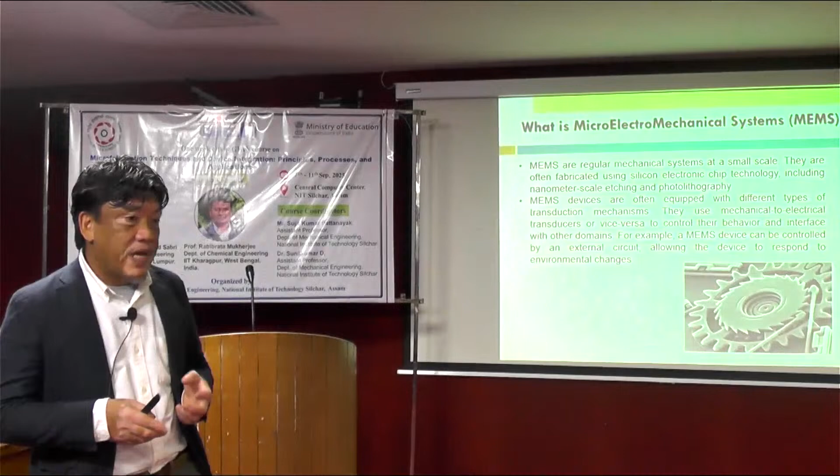For example, as I've mentioned, you have piezoelectric actuators that can be the motor to move certain parts of the machine. You have electrostatic force, which can also make things rotate or move. And you can have electromagnetics, etc., in order to actuate or move some nanoscale or microscale components inside the MEMS devices.

MEMS devices can be controlled by an external circuit, allowing the device to respond to environmental changes. So you can have some kind of actuator embedded into the MEMS devices. Later on, when it responds to heat or light, for example, it can make movement. That sensitivity towards the environment and anything that can make the machine respond can then be used as a tool to accomplish whatever intended work needs to be done.

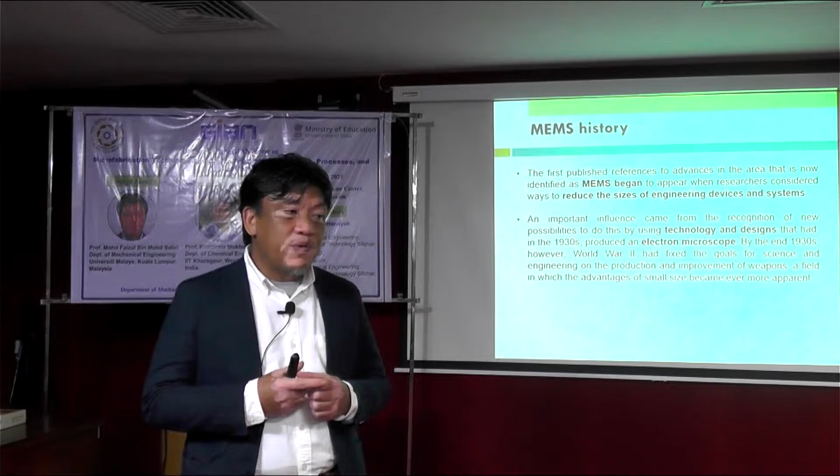A little bit of history of MEMS: the first published reference to advances in the area now identified as MEMS appeared when researchers considered ways to reduce the size of engineering devices and systems. So it's not purely from a requirement for small things - MEMS also evolved with certain concepts and principles. Originally, we wanted a small device so it would become more efficient than a big device, then you proceed with precision engineering.

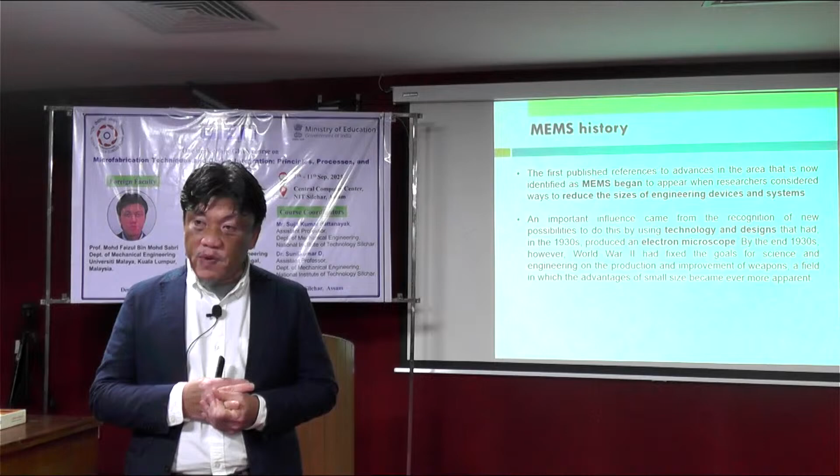From precision engineering, it evolved more toward smaller scale and smaller devices, to lower energy consumption or to increase device performance. So you make it smaller and smaller, and with that you move more toward sustainable engineering. That is part of the philosophy or initial intention of MEMS.

An important influence came from the recognition of new possibilities using technology and design that, in the 1930s - quite a long time ago - produced an electron microscope.

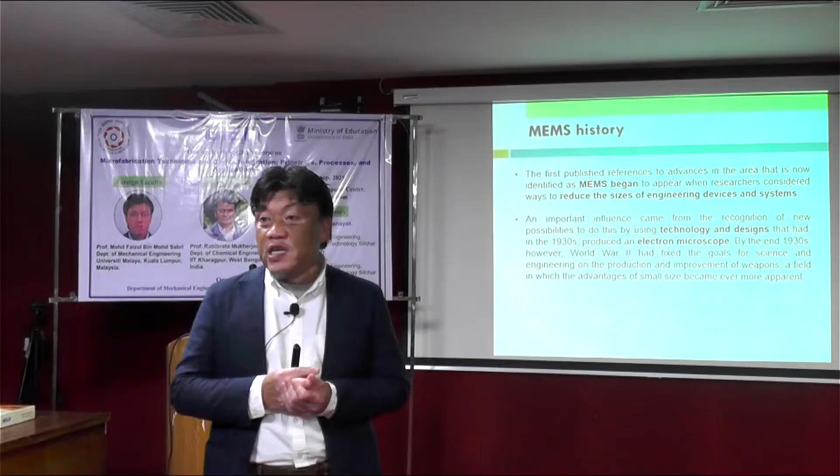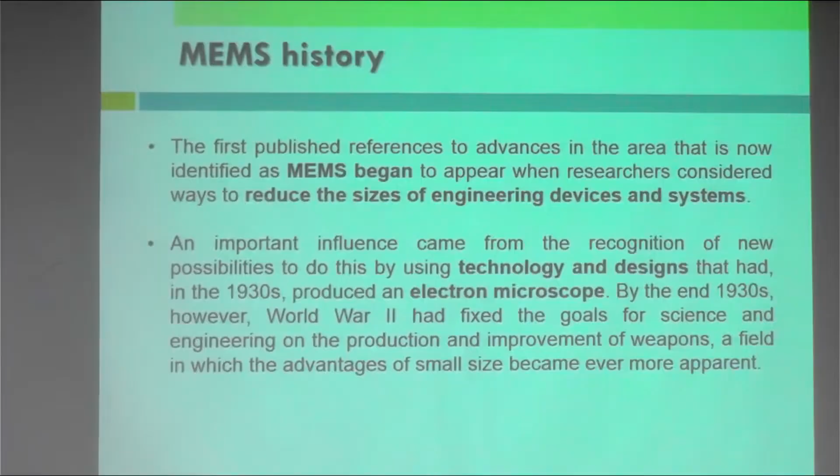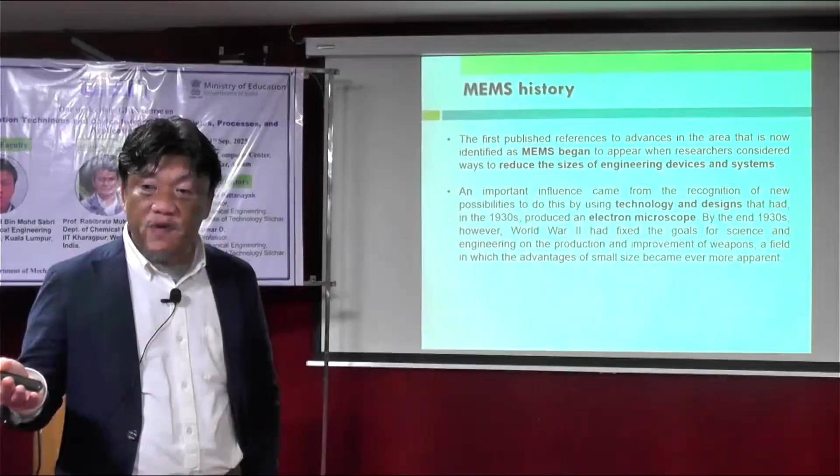The first electron microscope was introduced, but to make an electron microscope you need technology, because scanning electron microscope, or SEM, is very precise and uses a lot of high precision things. With that, you need to develop something small in order to make things precise. So starting from there, it evolved towards precision things for military and aerospace applications.

A compelling urgency for miniaturization arose from the needs for robotic systems in the new growth area of rocket systems, for example. That is part of it. When the war finally ended, progress made in robotic control systems became a stimulant for space research, an area brought into sharp focus at the newly founded JPL.

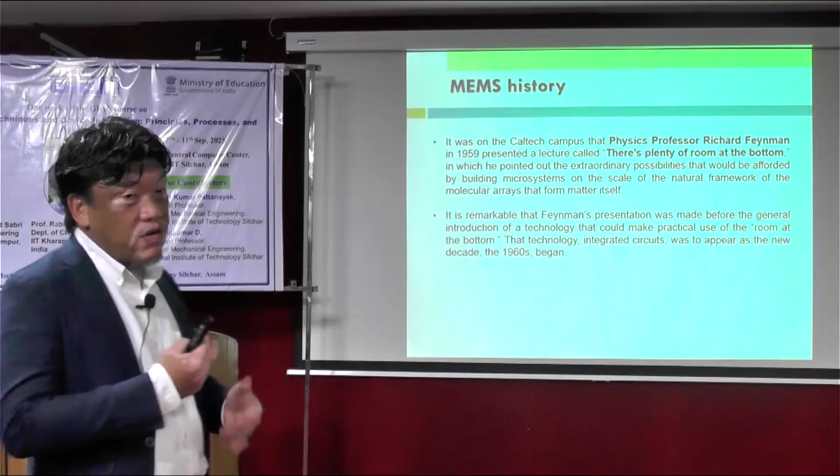I think most of us know JPL at Caltech. He was a Caltech physics professor, Richard Feynman. He wrote an essay titled 'There's Plenty of Room at the Bottom.' This was his philosophical look into materials and products to be developed at the small scale, in which he pointed out the extraordinary possibilities that would be afforded by building microsystems on the scale of the natural framework of molecular arrays that form matter itself.

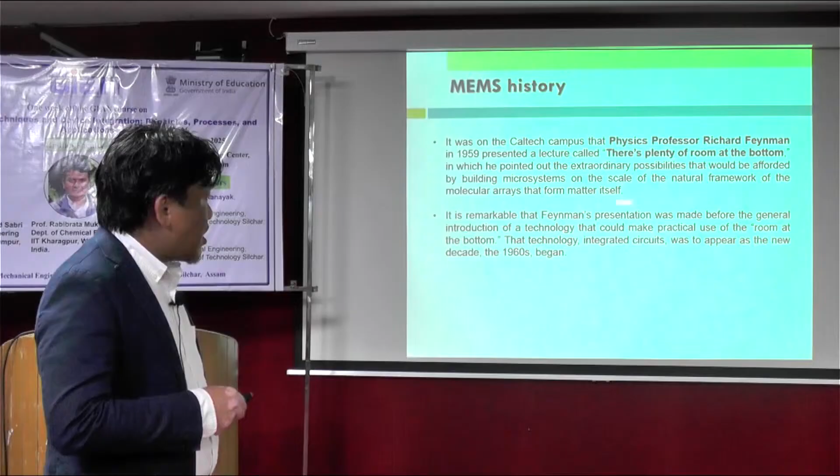It is remarkable that Feynman's presentation was made before the general introduction of a technology that could make practical use of room at the bottom. So all these things are about, as I mentioned before, semiconductors - the integrated circuit, IC, which appeared as the new thing in the 1960s decade.

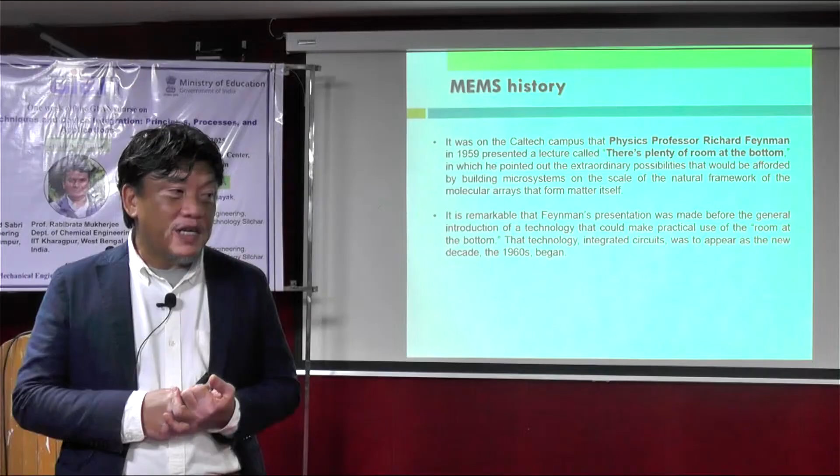I think everyone knows when we talk about chips, now you talk about 2 nanometer, right? Intel introduced 2 nanometer, 3 nanometer has been introduced, but now TSMC, Taiwan Semiconductor Manufacturing Company, is developing mass production for 2 nanometer circuit lines. So that is where we are heading with MEMS and microfabrication.

The growth of MEMS was very slow because researchers concentrated their attention on the expanding capabilities and commercial products that could be developed in purely electronic integrated circuits. So the focus was IC design using semiconductor processes rather than developing the device itself.

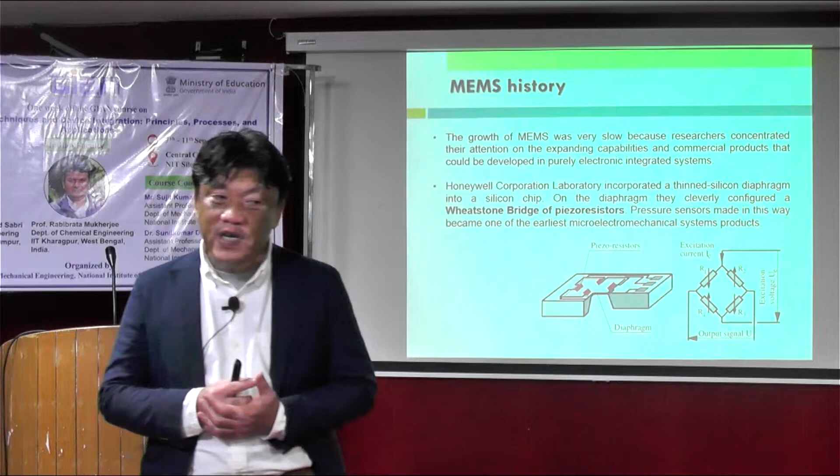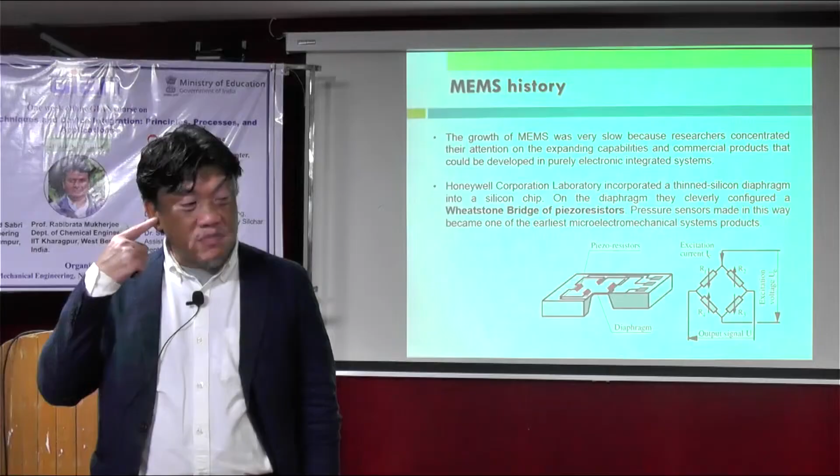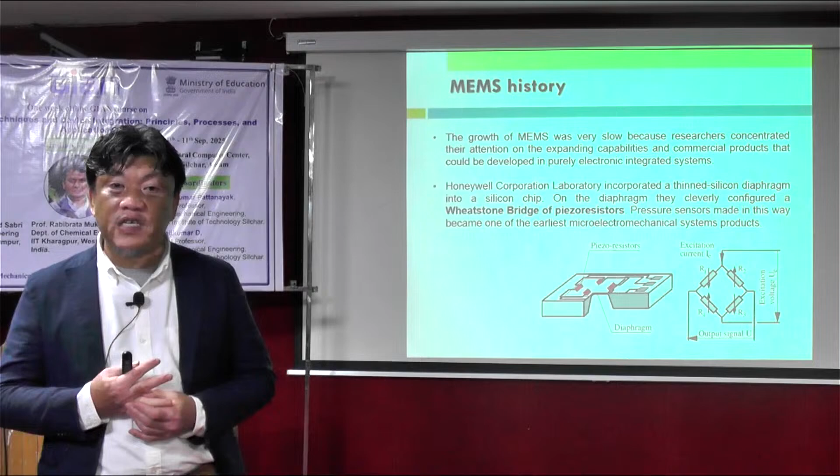Now, if you see, you have a MEMS microphone, right, in your handphone. Even your earbuds have a MEMS microphone and also speakers, MEMS speakers. So that kind of device came a little bit later because people concentrated too much on the integrated circuit itself rather than the device. But you can see a lot of devices in biomedical applications, in electronics applications such as speakers, etc.

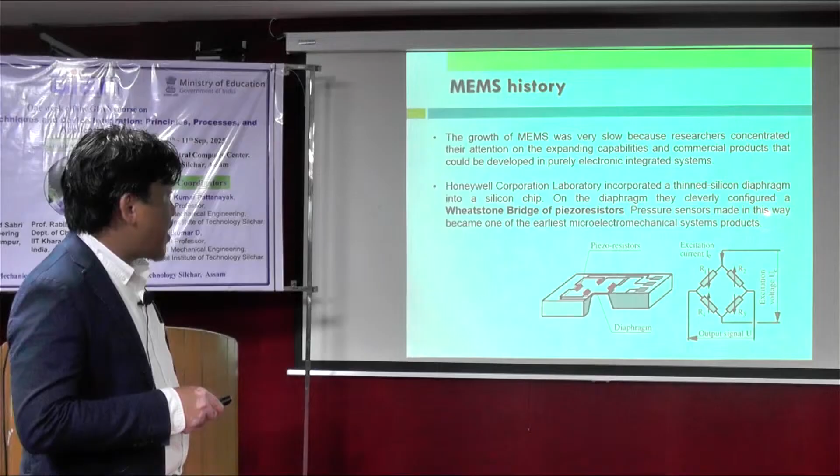Honeywell Corporation Laboratory incorporated a thinned-silicon diaphragm into a silicon chip. On the diaphragm, they cleverly configured a Wheatstone bridge of piezoresistors. Pressure sensors made in this way became one of the earliest micro electromechanical system products developed. So this kind of pressure sensor, when there's a pressure difference, pushes this diaphragm.

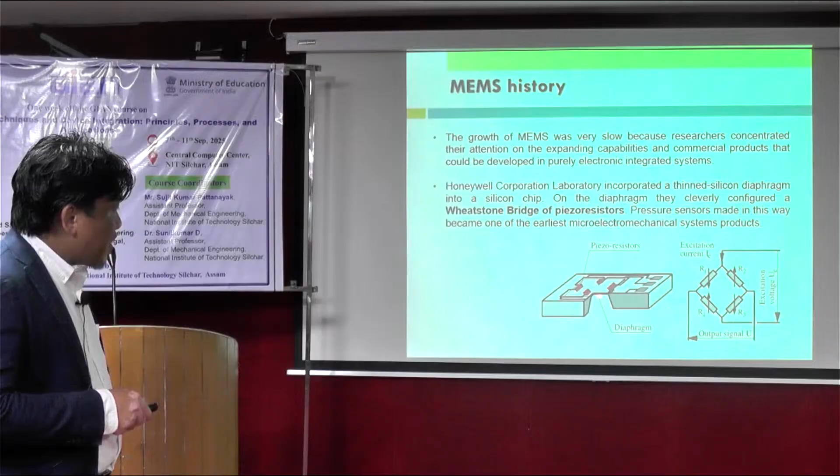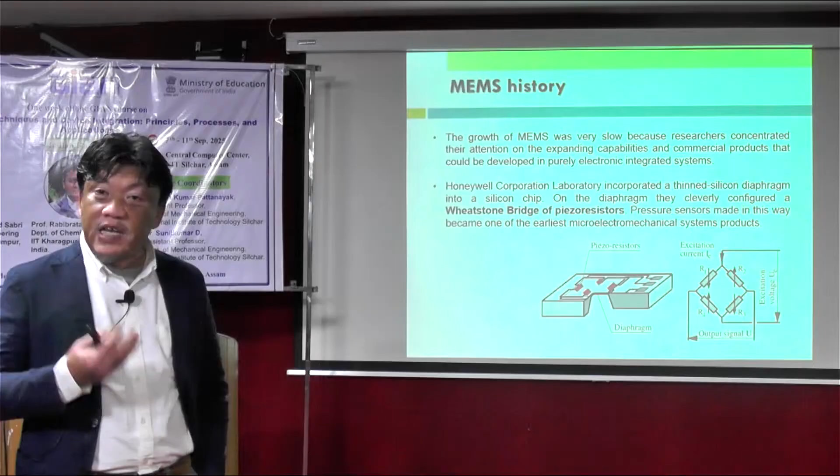With a piezoelectric material, when you provide strain to it, you can induce electricity. That electricity is a signal of the change of pressure. So that is a very simple but quite accurate pressure sensor.

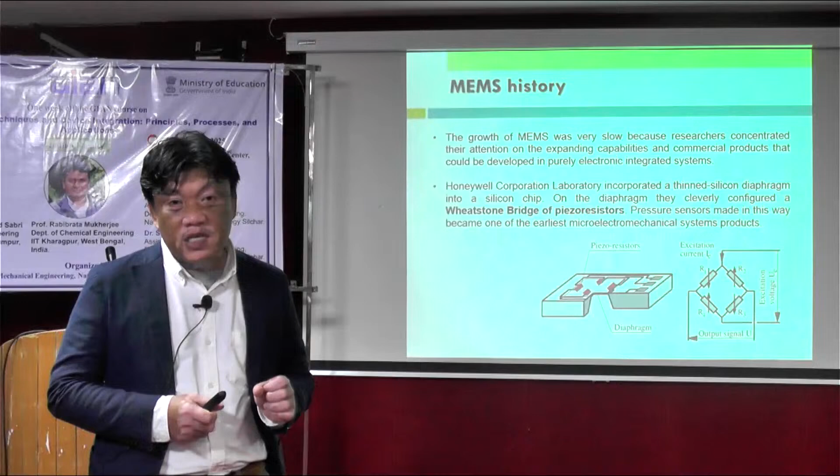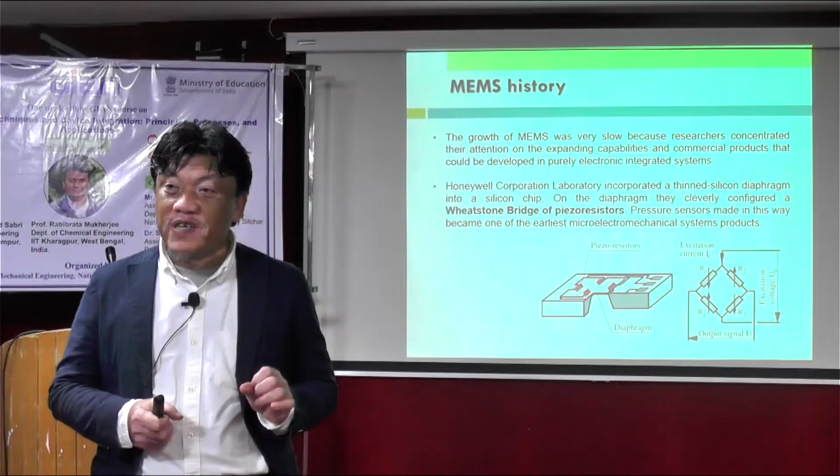This small pressure sensor, later on, can be used in quite a few places. For example, if you have an expensive car like a Mercedes, you have a pressure sensor in the tire itself. So if it's deflated or anything happens to the tire, the car can react accordingly because you can always measure the pressure of the tire inside.

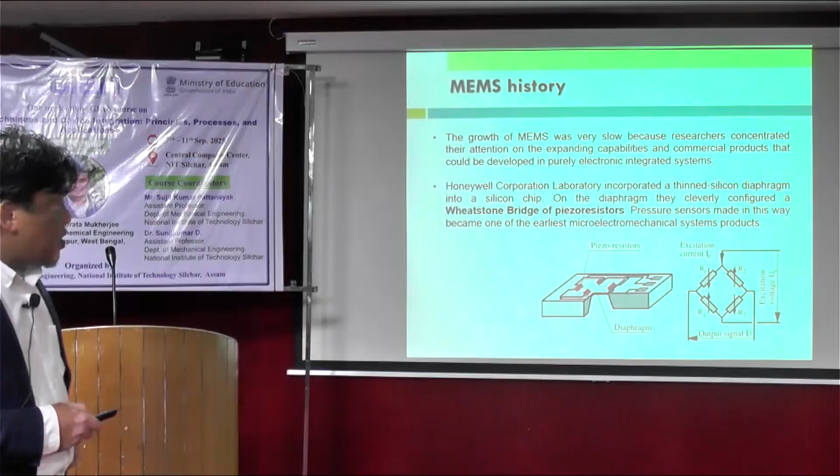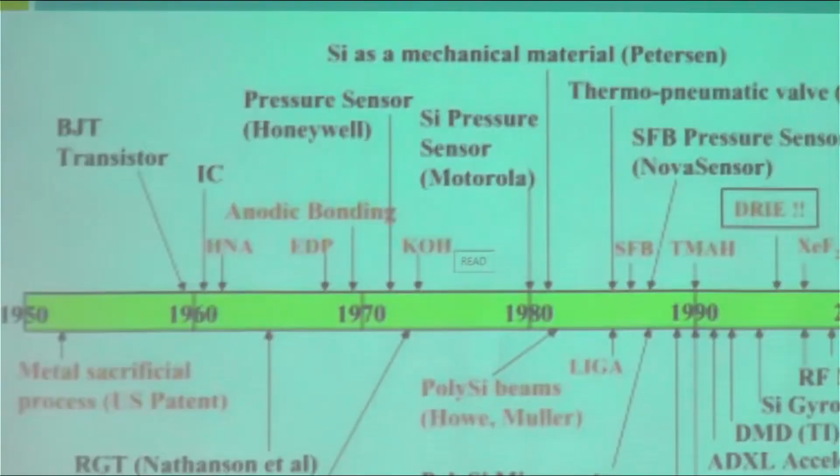Okay, a little bit of a summary of the overall MEMS devices. In the 1950s, the metal sacrificial process was patented in a US patent. Metal sacrificial means you have a layer of metal, then you sacrifice it to develop a certain pattern, because certain different materials can be removed using different chemicals. We call it etching - you can remove certain materials, for example with hydrochloric or sulfuric acid, with different kinds of materials.

So using this kind of knowledge, you can make a sacrificial layer, for example. You have IC, everything, and then a pressure sensor in the 1970s, for example, and you have a thermopneumatic valve in the late 1980s, and polysilicon beams, and a lot of IR imagers, infrared, right? Infrared imager by Honeywell, polysilicon comb drive.

Comb drive is, maybe I will introduce you later. It's an electrostatic actuation method using comb shape.

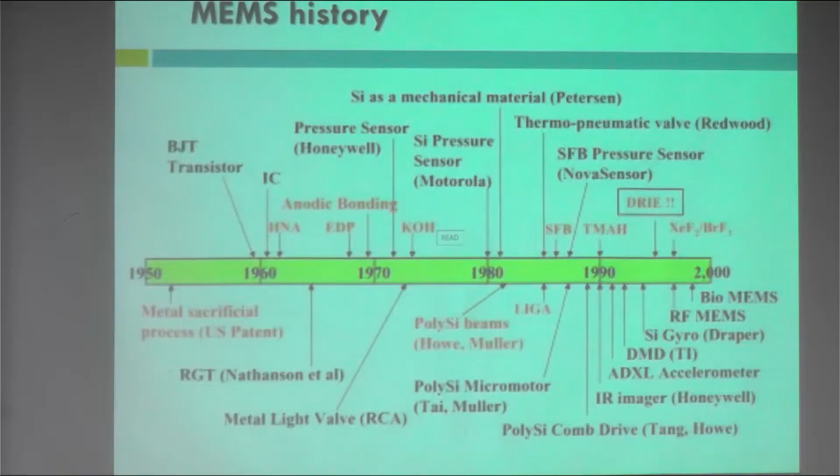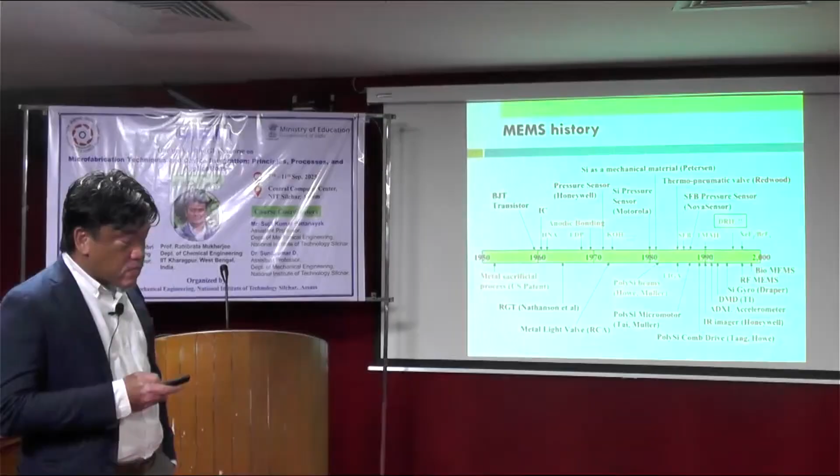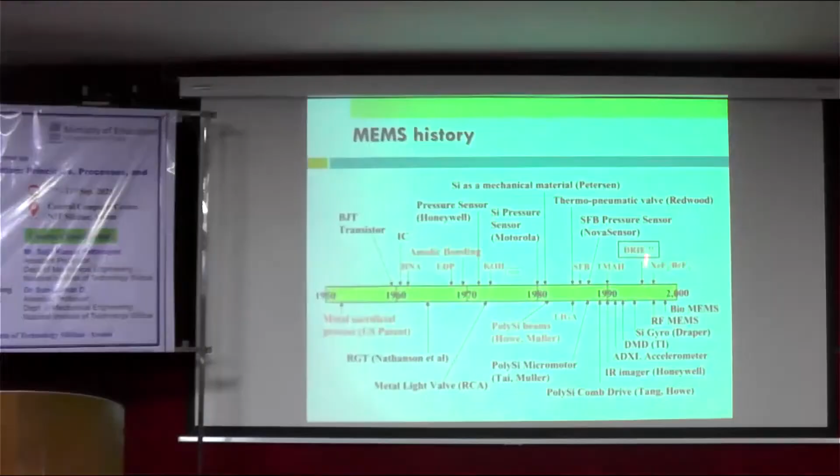So this is where DRIE, or deep reactive ion etching, is a process to remove material using ion bombardment, developed in the late 1990s. A lot of RF MEMS - RF is radio frequency - enable our different 3G, 4G, 5G networks using high frequency domain of things. So using MEMS, you can have something smaller, then you can have higher frequency without damaging the materials itself.

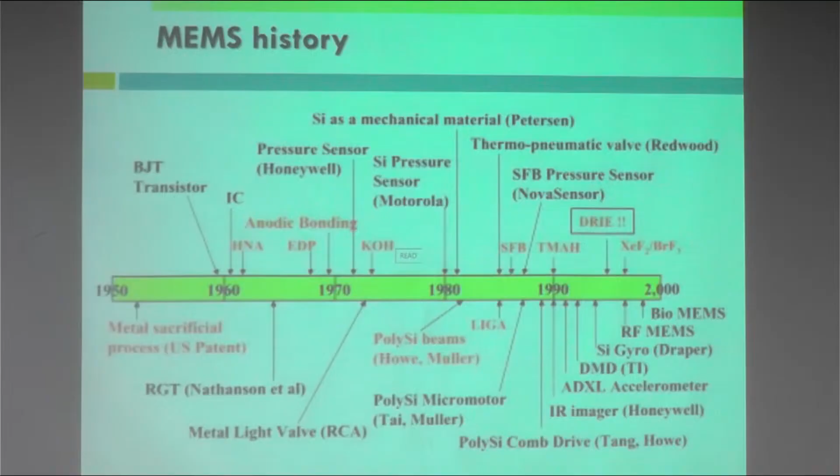So bacteria, then sugar molecule at 1 nano - bacteria is about 1 micron. If you talk about a 2 nano device, a 2 nano electric circuit, this is at the molecule level. So the arrangement of 2 molecules of sugar is the circuit line. Imagine it's just a contaminant we normally cannot see with the naked eye.

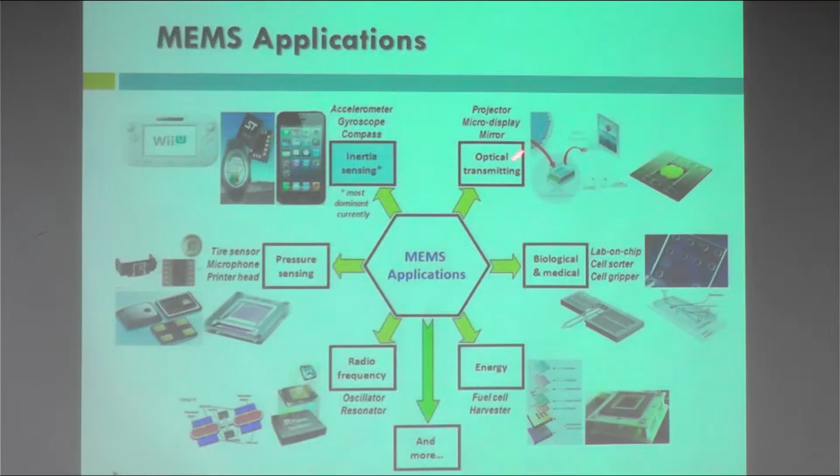We have a projector for micro display. I think you have seen in some devices you can project some video or image on the wall using small devices as well.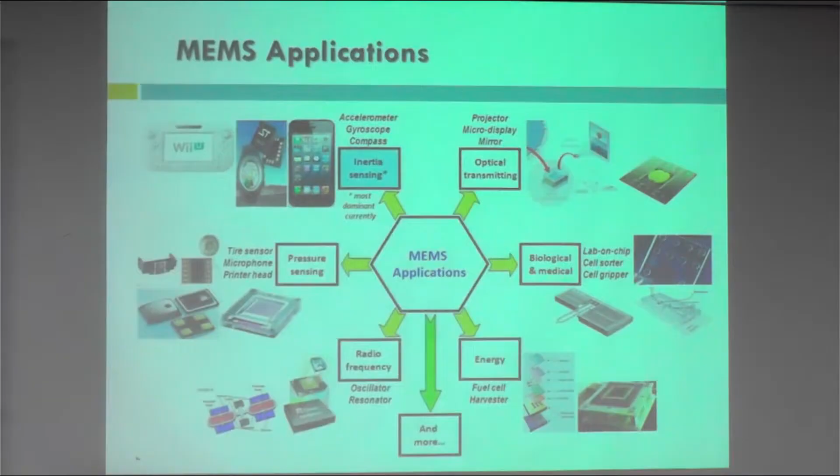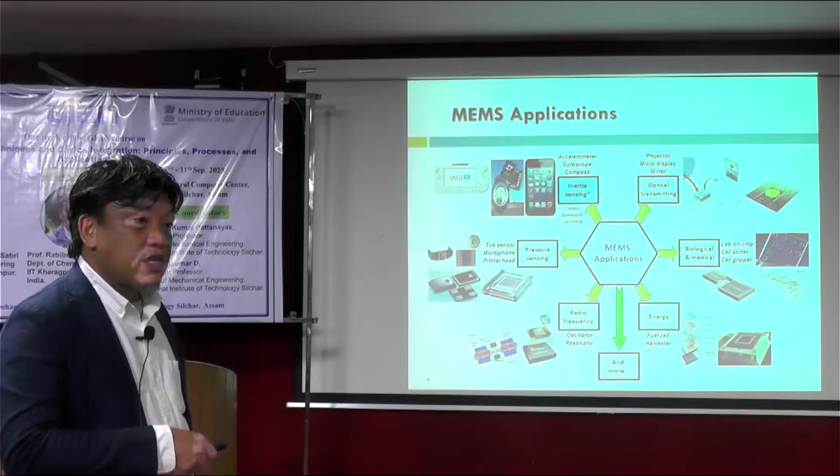Then for biological and medical devices, we have microfluidic sensors. You make a very small microfluidic disc, for example, then with rotation, you can mix biological substances with a chemical to detect something. You can also measure using this kind of cantilever - you can measure one molecule of things, getting feedback from your measurement of a very precise molecule. You can measure the heat of a molecule, or the weight of a molecule, using this kind of cantilever, depending on the materials and principle you are using.

Then for fuel cells, you have a membrane, for example, to fabricate the membrane and the electrode for the fuel cell, and RF MEMS as I mentioned - very small devices now with high frequency 5G, 6G coming. Then you have pressure sensors, as I mentioned, in tires, in microphones, printer heads. We will see some examples later during our case study for MEMS applications in detail.

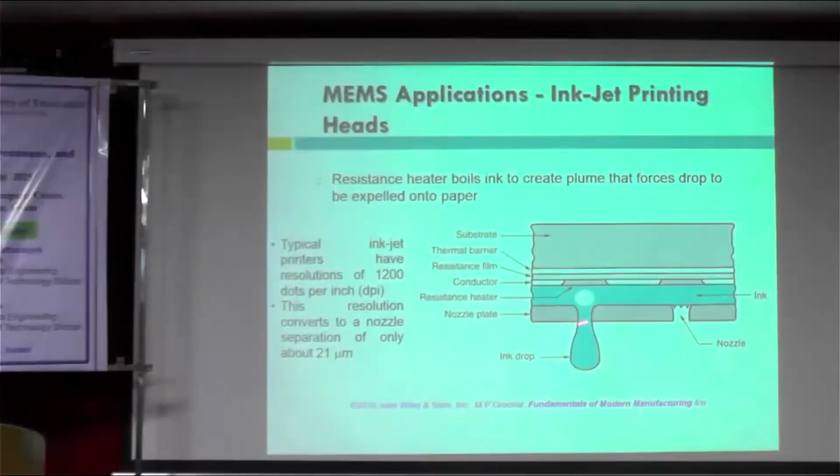So this is just to provide a quick glance of MEMS application. Let's say you have this inkjet printing head. With this inkjet printing head, you have a small nozzle, a few microns, depending on design. For example, with resolution of 1200 dpi, this is about a 21 micrometer nozzle. So you use a resistance heater. When you heat up here, this fluid or liquid will expand due to heat, and you can have a drop of ink injected from here. So of course, you have different types of inkjet heads. You can use piezoelectric, for example, as an actuator.

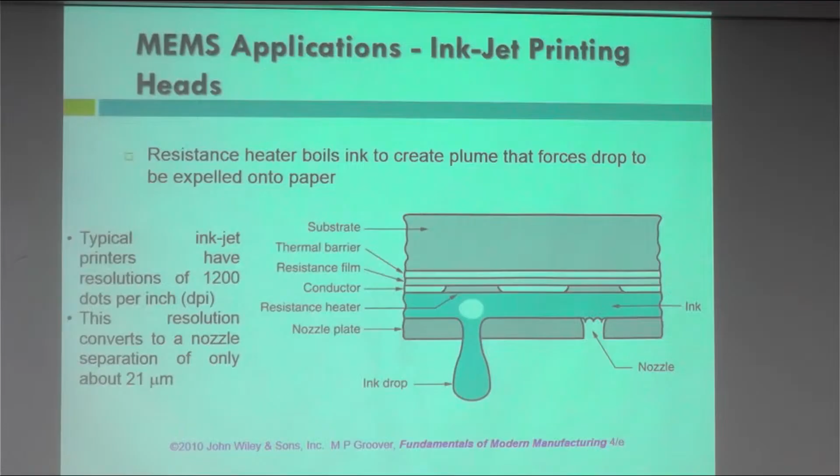And we are dealing in the next 50 years with the SDG, UN Sustainable Development Goals. We are predicted to need to address issues of energy because of increase in population. We have to look into water security, food security, environmental issues, poverty, terrorism and war, disease, education, democracy, population, etc. But some of these can be addressed by using less materials. If we use MEMS technology with micro scale devices, we can use less material instead of using a big bulk material to have devices at a big scale.

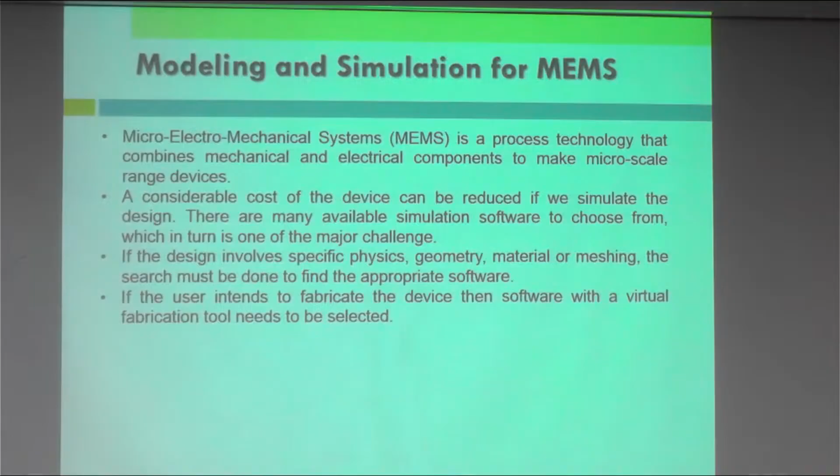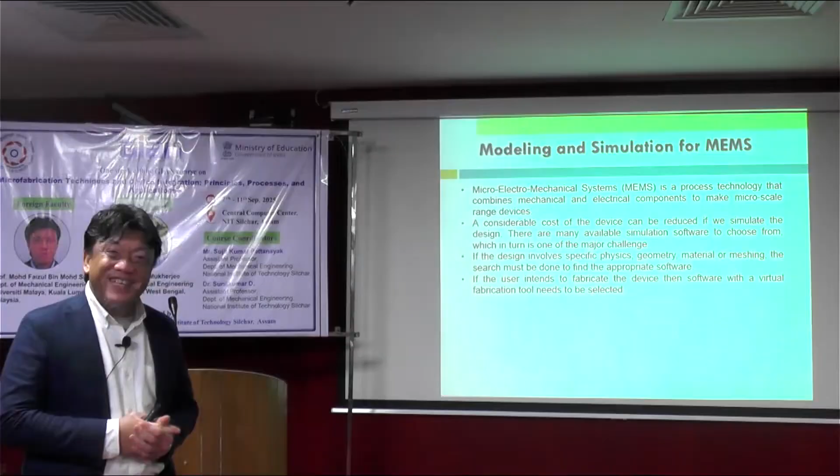Skip this one. Okay. Then we look into the modeling and simulation for MEMS. I think some of you become sleepy. It's just me talking. Any questions so far? No? Everything good? Okay, so shall I continue?

Microelectromechanical system is a process technology that combines mechanical and electrical components to make micro-scale range devices. A considerable cost of the device can be reduced if we simulate the design. It's the same as some other things as well. There are many available simulation software to choose from, which in turn is one of the major challenges. If the design involves specific physics, geometry, materials, or meshing, a search must be done to find appropriate software, because some software has limitations.

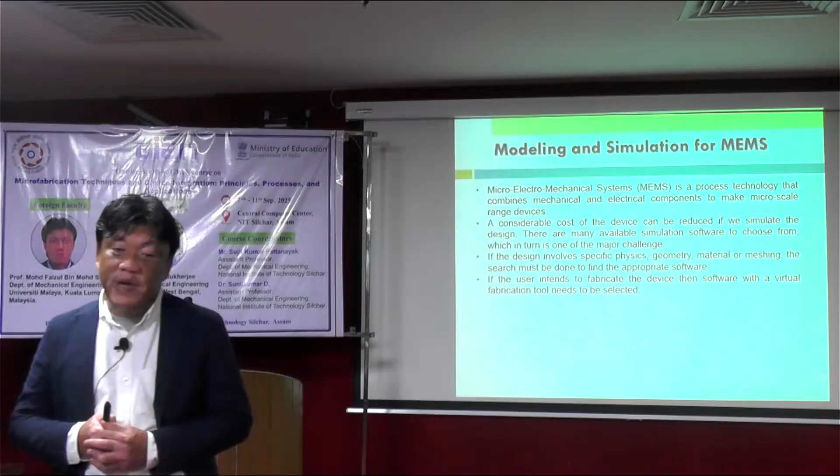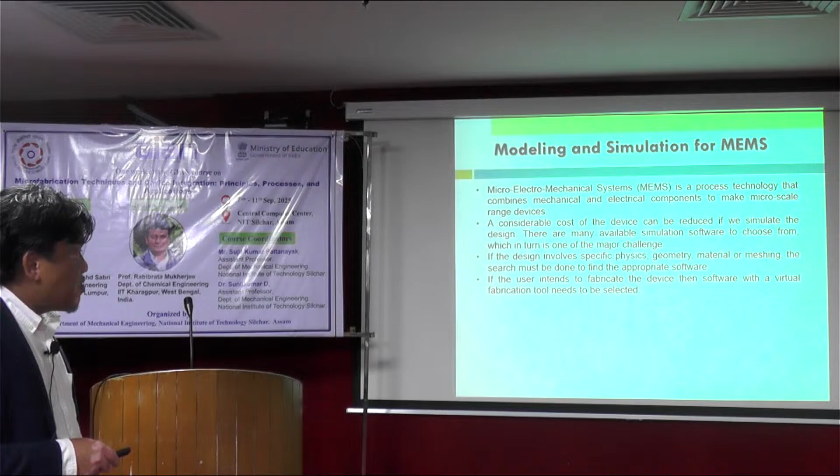You can simulate at a micro scale, or you can simulate at macro scale, but the thing is, at the micro and nano scale, things do not follow Newtonian mechanics. So you have to integrate a little bit different physics, maybe quantum mechanics or something else. I'm not well versed in this, but somehow Newtonian mechanics for macro scale will not provide accurate prediction. So you need to carefully look into software which can handle this. If the user intends to fabricate the device, then software with virtual fabrication tools needs to be selected as well. So you have process simulation as well for MEMS, but that is a secondary stage.

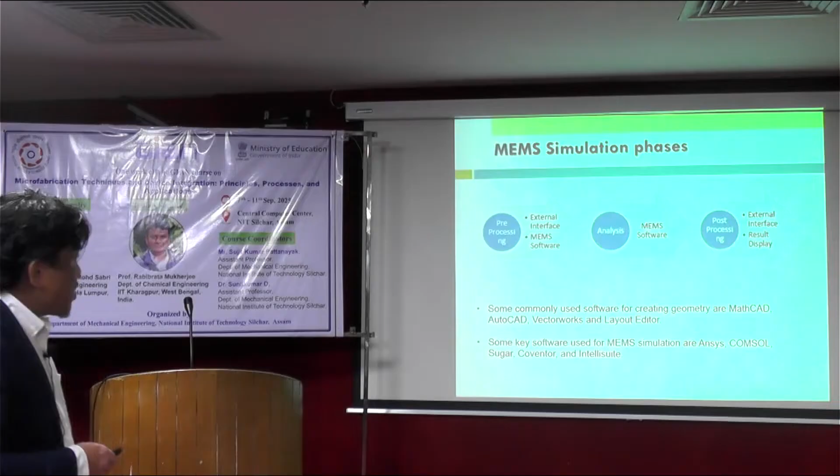But firstly, when you design something, you want to know the performance, right? The device performance. So when you get the device design, the MEMS simulation phase involves pre-processing, external interface, then MEMS software. Then you have software to do analysis with the MEMS software. Then you have post-processing, external interface, and result display. So this is quite similar to what we have with common software processes.

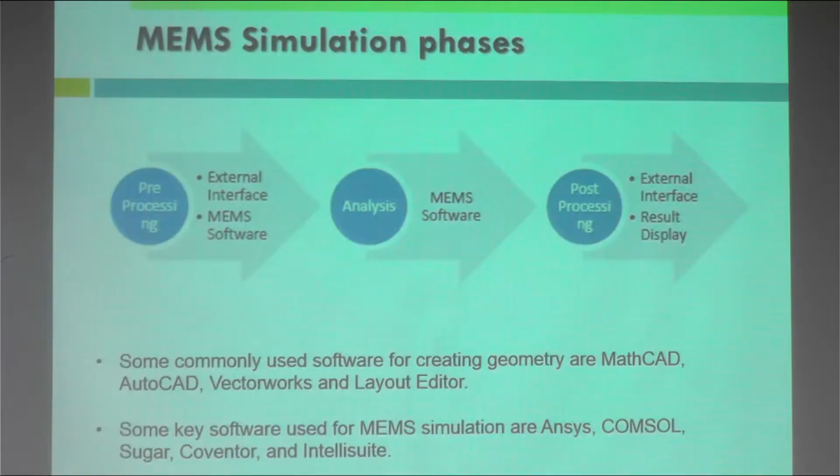Some commonly used software for creating geometry include MathCAD, AutoCAD, Vectorworks, and Layout Editor. Some key software used for MEMS simulation are ANSYS. Has anyone used ANSYS so far? No? Okay, are you familiar with ANSYS? Okay, good. And you can use COMSOL, Sugar, Coventor, IntelliSuite. So these are quite commonly used MEMS software to simulate MEMS.

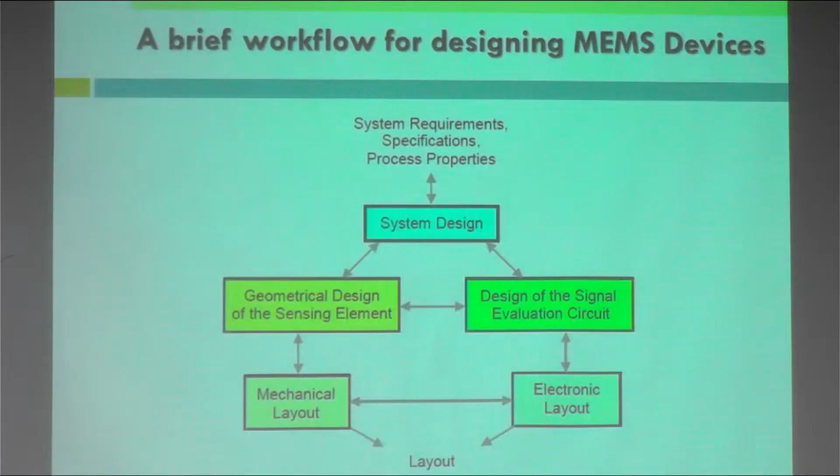Then you have your mechanical layout and your electronic layout. Some devices integrate everything, but some just provide the electronic layout or circuit layout on the MEMS devices. Then you control everything at the other, integrate electronic parts. Then you have your overall layout here. So this is the general process of designing a MEMS device.

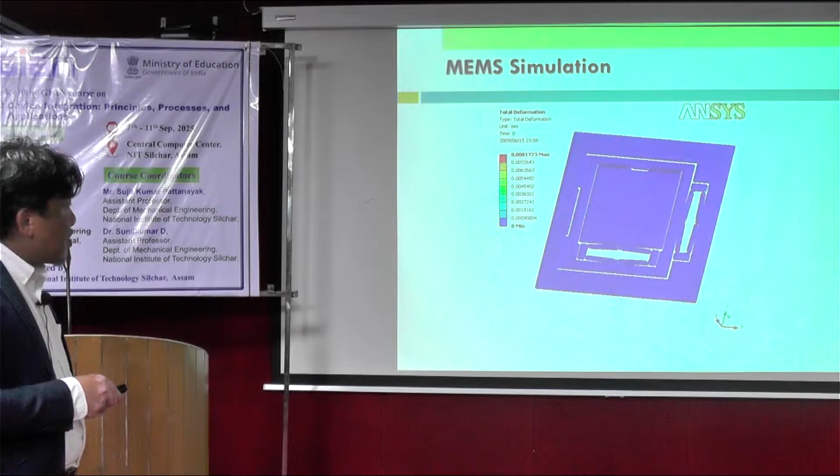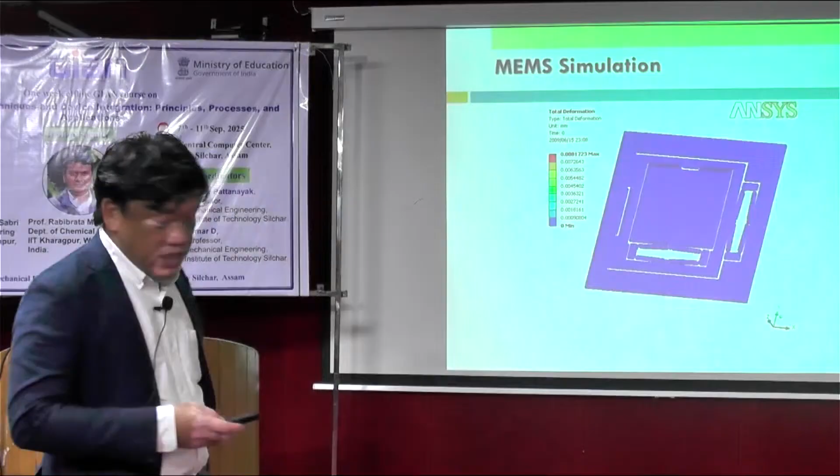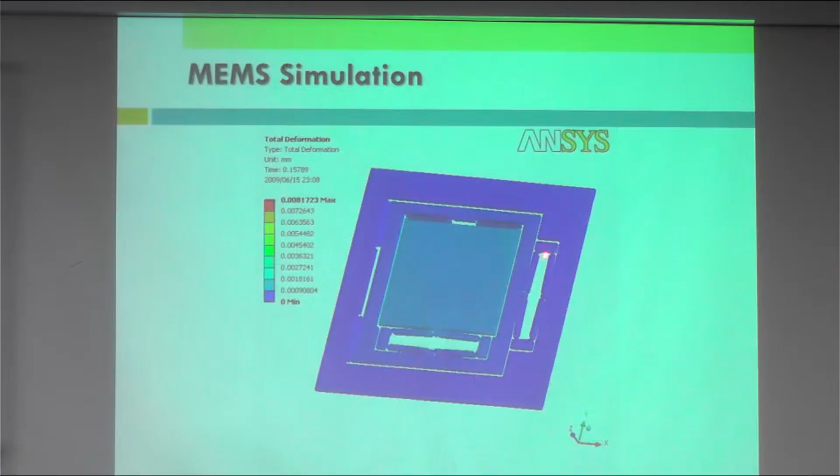There is a kind of animation for this. You can see that you can move for both direction X and Y. So you can simulate this using ANSYS, and this has been done by providing force here, because this place is intended to have an actuator, so piezoelectric.

So it expands here. When the piezoelectric actuator is located here, then you can have the expansion of the displacement of the piezoelectric. Then it will push these two sides. Then this stage will move to the right, and the same here.

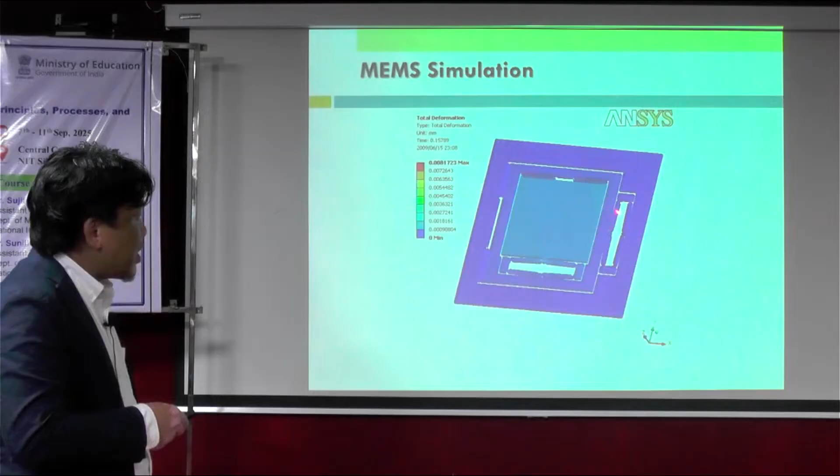So that is the piezoelectric actuator with a MEMS. Of course, this simulation is intended to measure how far you can move the stage in X and Y direction, and how much force you need to exert on both sides, meaning it will provide some specification or requirement for you to design the actuator as well.

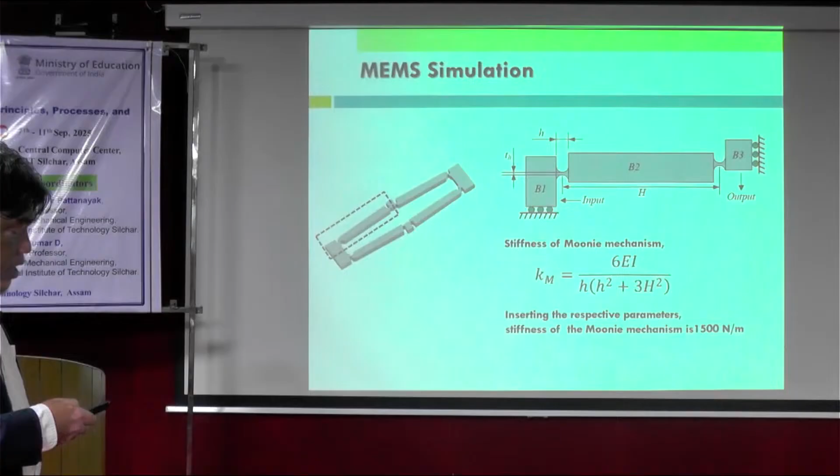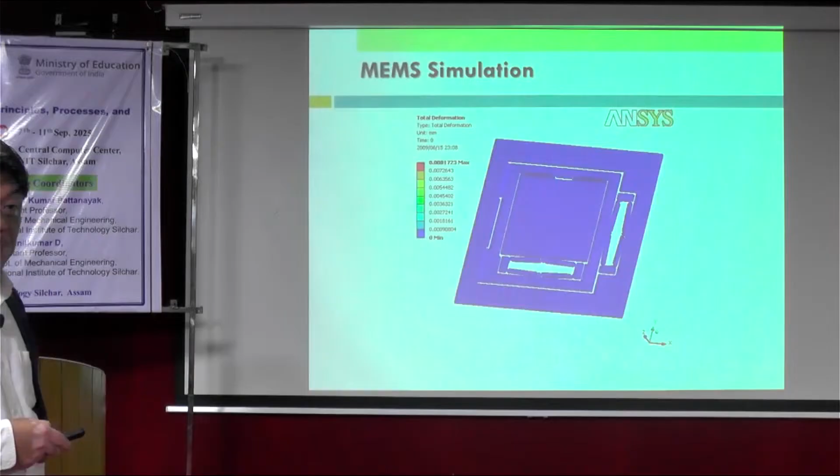Apart from that, there is a hinge at every place, because this hinge will provide the flexibility to move, to make a movement of this stage, for example. Then you can also simulate this hinge itself in order to get the right design and the right hinge size. So when the input force is here, how much will this displacement be?

The displacement of this will provide the displacement of this side. So the design of the hinge is critical to make sure it will be able to move, and to a certain extent have the robustness to hold the loading of the stage itself.

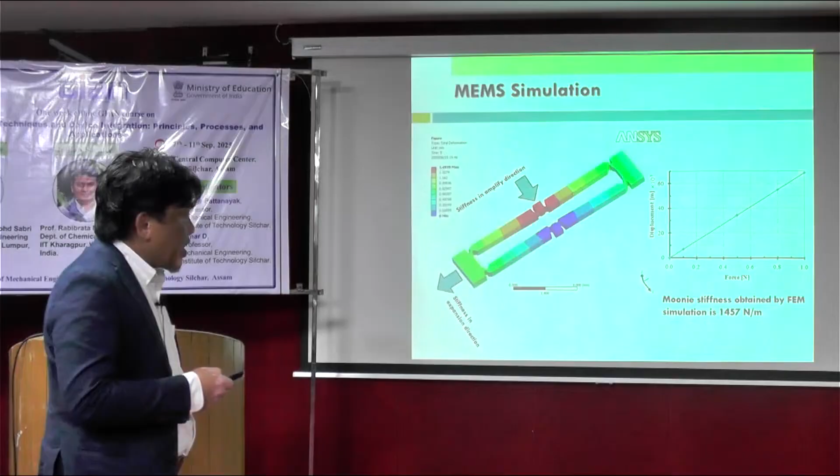It can be done through numerical calculation, and it can also be done by simulation. If you do simulation, for example, you can get the relationship between displacement and force. Force in this direction, meaning how much force you can supply to make the movement, because you have to overcome some other spring issues as well. So this is a kind of simulation that can be done using ANSYS for MEMS simulation.

And this is the actuator that you put in between. So you can do the simulation and get the relationship between, let's say this is FEM, the simulation using ANSYS. You can see that the angle here is very important in order to have an amplification factor.

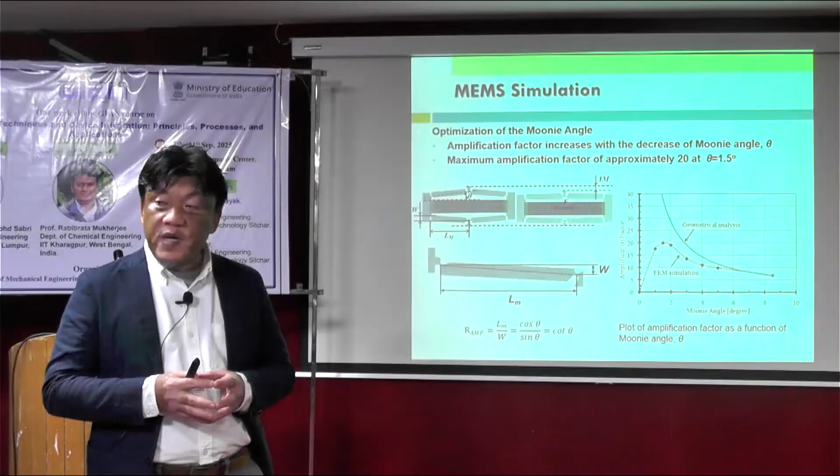This structure basically can amplify the force, and also amplify the movement, the displacement. So with a small displacement, you can amplify it a few times. For example, here you amplify up to nearly 20 times. If your actuator can only make 2 micrometers, with that 2 micrometer movement, you can get nearly 40 micrometers. So with a 2 micrometer movement, you can get this delta up to 40 micrometers. That is a very huge amplification.

Another simulation, another thing that has been simulated for this design, is the stiffness of the spring here. So you have a spring mechanism, then you need to make sure this spring is not so stiff that you cannot make the movement.

But to a certain extent, you have to maintain the robustness of the spring to withhold the stage, because the stage also has some mass. So you need to make sure this spring can withstand it, and also is flexible enough to make sure the movement can be done. So let's say with a 50 micrometer thickness of the spring, you can simulate, then change the dimension to maybe 60 to see how much force is required to make sure the movement can be done by these systems.

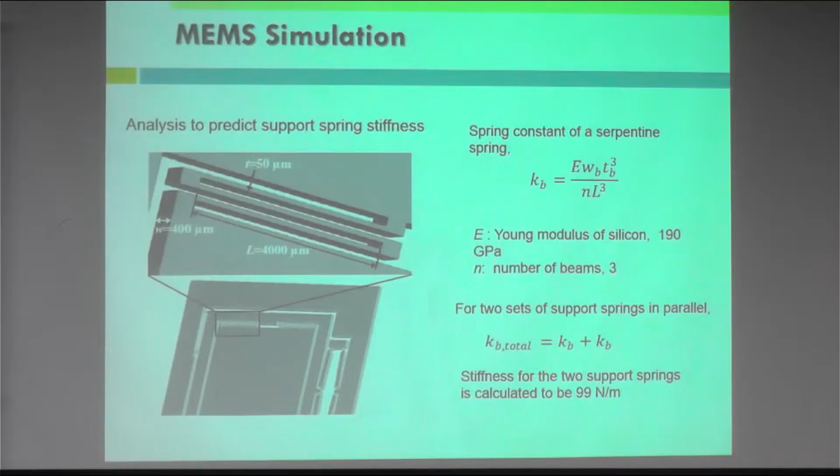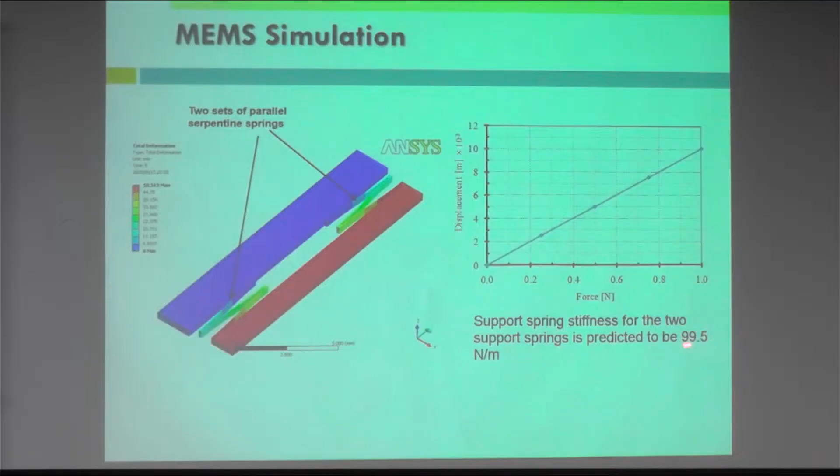So this is another MEMS simulation using ANSYS. It's almost the same thing, but I would like to show you the layout of an example using ANSYS.

I think the file is here. It's not linked. Let me see. Which one? Is it this one? Ah okay, oh sorry.

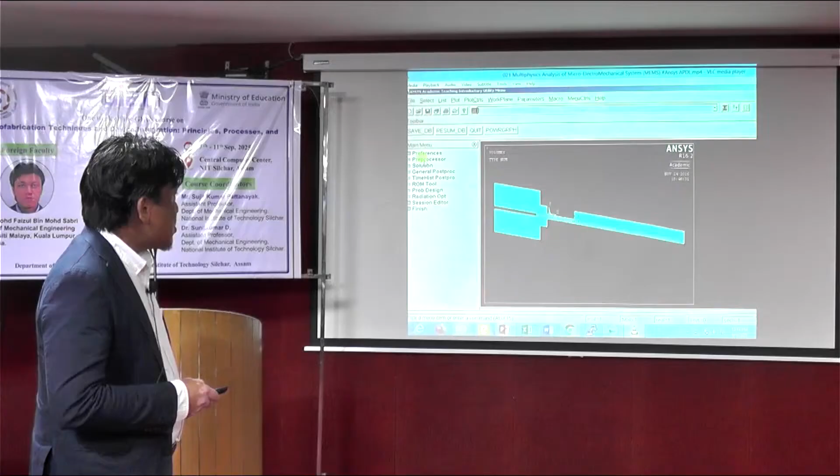This is a kind of cantilever, then with pre-processing. It's not that difficult for those who are quite familiar with the software.

There's basically a tutorial for designing MEMS available for each software. Even if you use IntelliSuite, ANSYS or COMSOL, there are many tutorials you can learn from the company's website. You can learn how to use a certain design, but if you have a different design, you just follow the steps while developing your own design.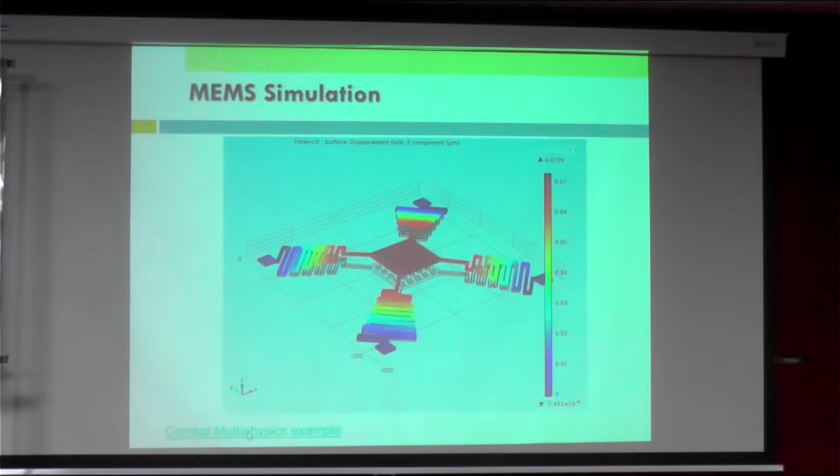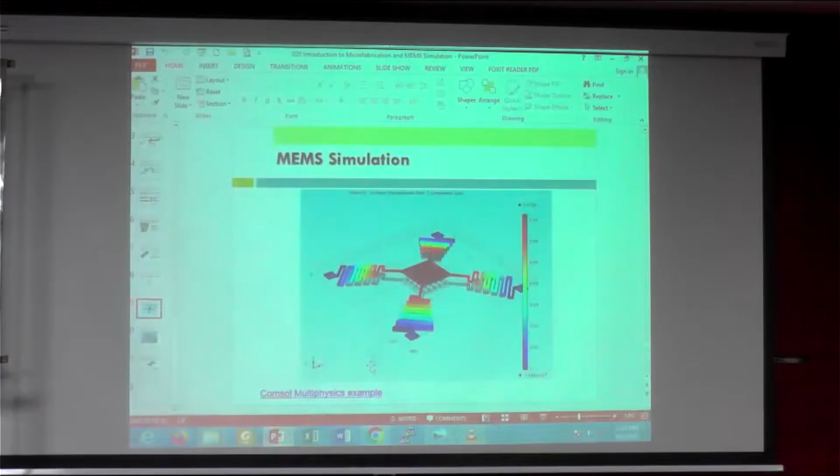That's in the folder, you open the folder. COMSOL, where is COMSOL? Coventor, maybe this one is COMSOL. Yeah, I think so. Just go forward a few minutes.

Hello everyone, HFWorks, which is used for electromagnetic simulation. We have seen within a few years some of these issues. Now let's look at some challenges posed by MEMS applications. Sometimes we can integrate the model created in SolidWorks, and export or import the model into ANSYS or COMSOL to do further multi-physics simulation.

So you do geometric modeling using SolidWorks. Even in SolidWorks, to a certain extent, you can do MEMS simulation nowadays, using different material options versus output results to get the right and optimal behavior of devices, including different material types, anisotropic materials, temperature dependent materials.

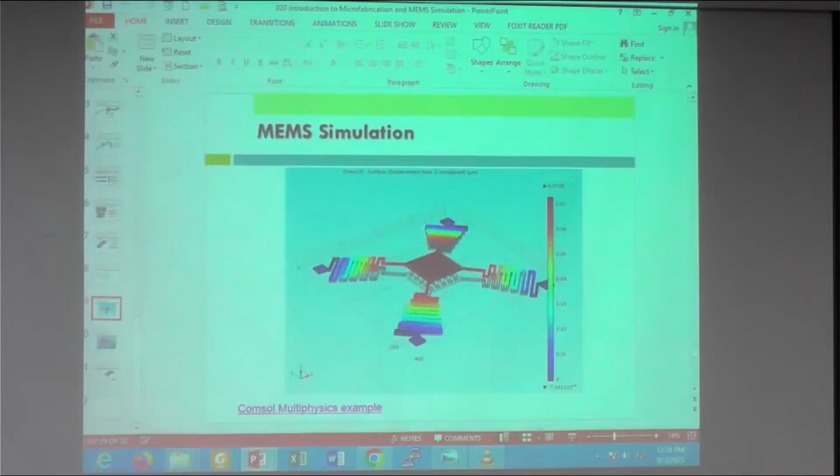Okay, just to get you to know a few things. This is using IntelliSuite. Maybe you can show the interface of IntelliSuite.

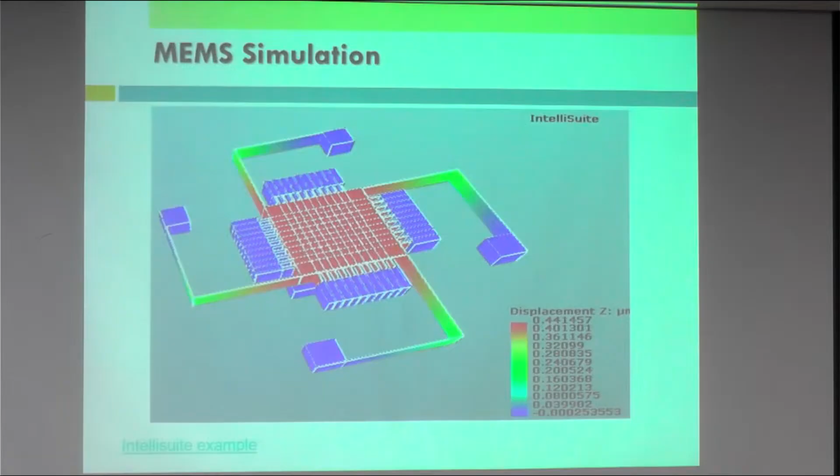So let's start the design of a comb drive structure. Here I've created 2 layers, one is comb and pads. I create them by adding new layers, and I can change the color here. Maybe you can skip a few minutes.

The idea of changing the color is to differentiate between the layers, so it can be used. We can hit escape, so this enables the y-axis selection. Here I select layer fill to have a clear look, and go to modeling to create a rectangle, then you do the simulation.

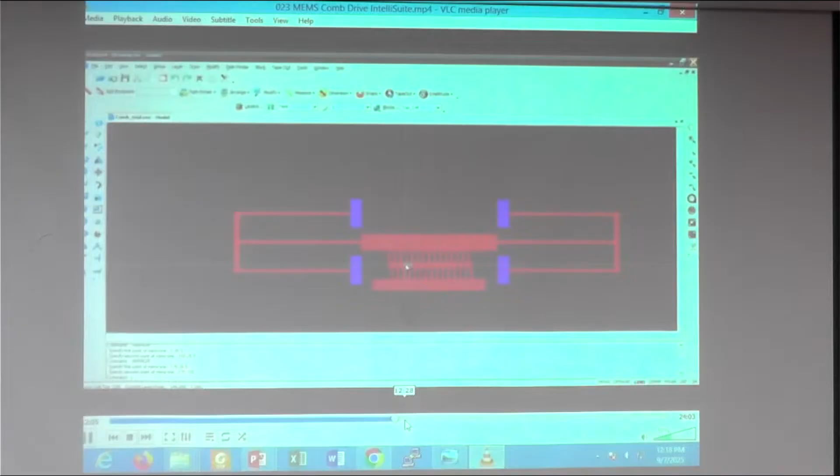Maybe at the center, halfway. Okay, this is a comb drive basically. A comb drive is an electrostatic actuator.

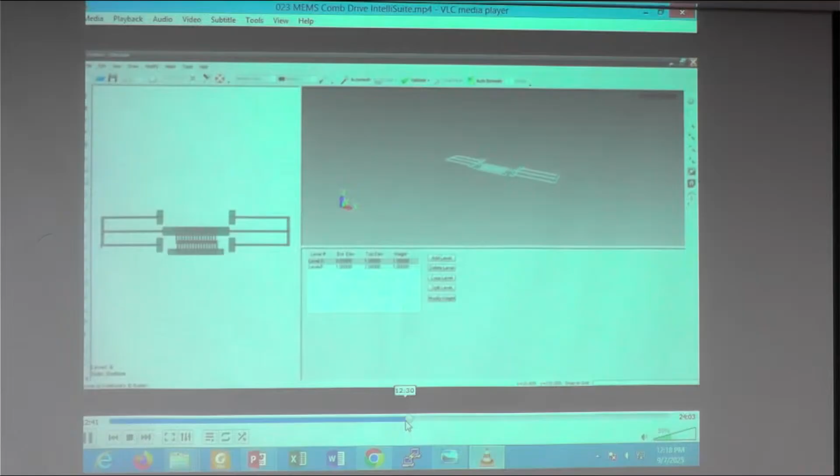So this is how you design, then you do the simulation for the comb drive. Then you apply electrostatic force. Then we see later on how the movement can be simulated, how much movement is made due to electrostatic force on this comb drive.

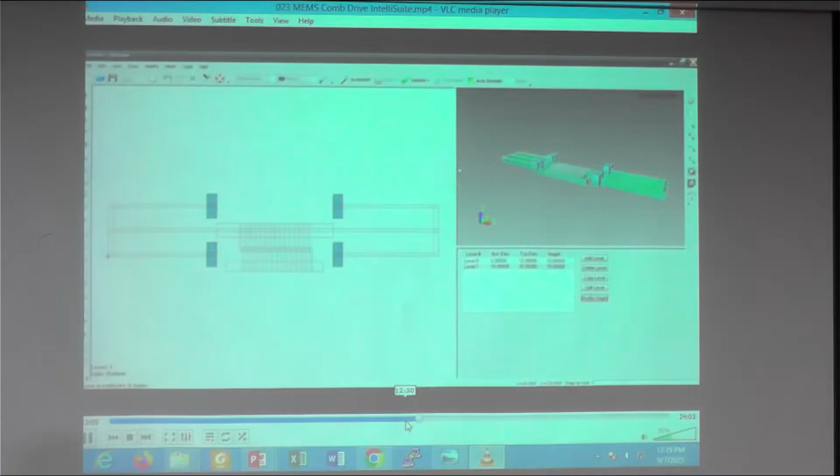A comb drive can be used as an actuator and also as a sensor, so it's bifunctional.

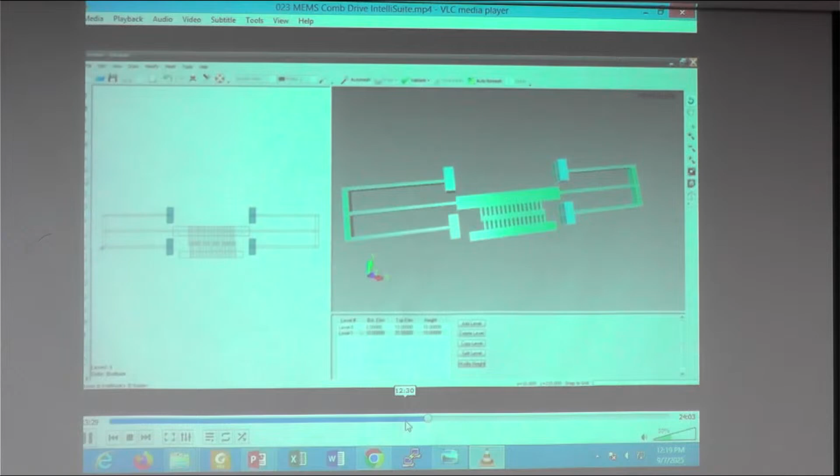Maybe you can forward. Okay, see some animation. So basically, this part is a kind of anchor.

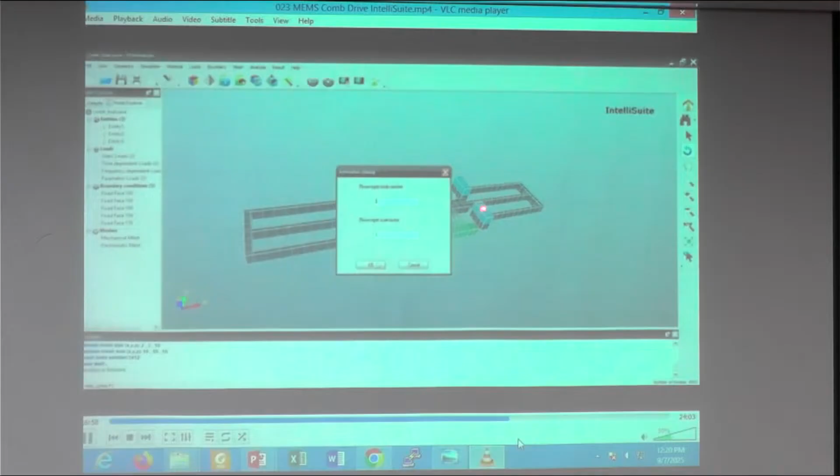For a comb drive, you have to have a circuit line on this, so that's where the MEMS process is complicated. It's not just structural things, but you have to have electrical simulation as well, to provide capacitance here for the capacitive sensor, and electrostatic force to this area. Then you have to have your circuit line pass through on the surface of this material. You can see that we can make a movement of this.

Okay, so that is a comb drive simulation basically. Right, so thank you.

Okay, this is using a Conventor example. I think this is just the interface of the Conventor, as can be seen here. So we can do the same thing as well.

The MEMS simulation uses electrostatic force, and normally MEMS actuation is electrostatic, piezoelectric, or heating. You have thermal deflection materials as well, and magnetic. Then you look into force, displacement, and rotation, for example.

A lot of things can be done using MEMS software. With many software, previously it was quite limited, but now you have a lot of options. You can use COMSOL, you can use ANSYS, even nowadays you can use SolidWorks to a certain extent. So all the multi-physics software can be used to simulate MEMS devices.

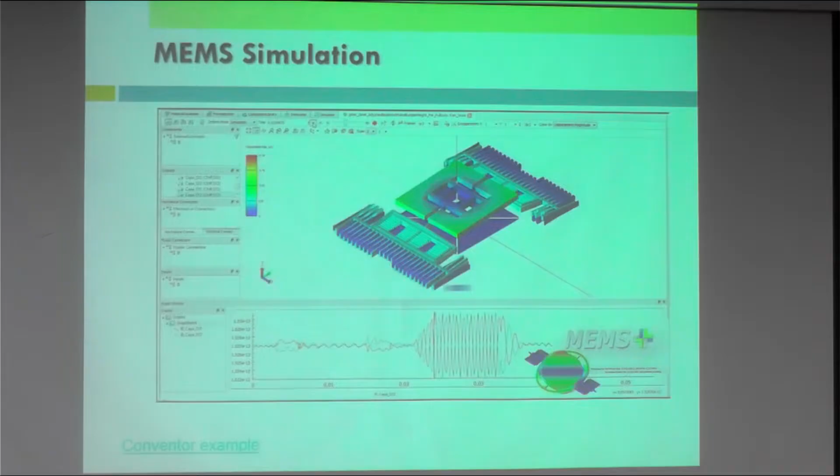All right, I think that's all. Thank you, any question?

Are we on time? A bit earlier. I think I'm a little bit earlier, 8 minutes earlier. Any soft? Yeah, pardon? Yeah, multi-physics software.

Good afternoon. Thank you for the wonderful lecture, we really enjoyed it. Many very interesting pieces of information were there in your slides.

Coming to my question, we have some multi-physics software, like for example in welding we use the same COMSOL multi-physics. But from your lecture, we came to know that we can use the same software for MEMS simulation also. Is it the same software or is it different? It's the same software, multi-physics COMSOL, right?

Okay, same software. So then here, what kind of heat flow will you apply? In welding we know the thermal cycle, we know some deformation type of thing, but here what will be the input from your end? Voltage input, then?